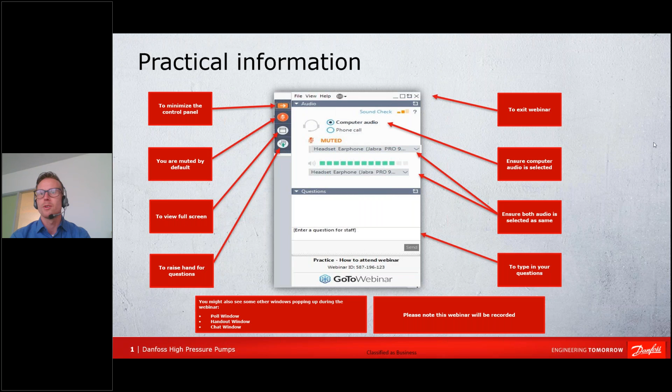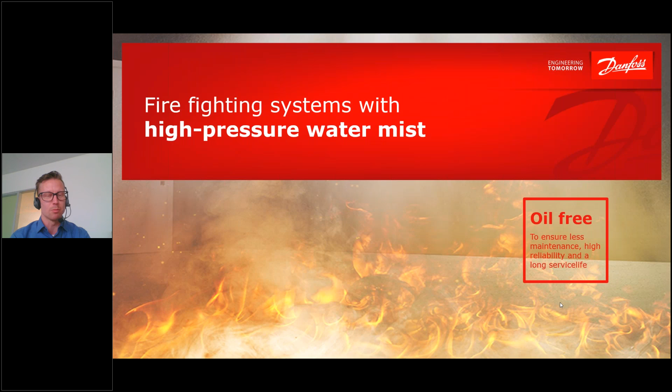Okay, but let's get started with the actual presentation. So what we will be talking about today is firefighting systems using high pressure water mist. And as I mentioned, we come from Danfoss high pressure pumps. I will be presenting the first part of this webinar where we talk about the high pressure water mist technology and some of its benefits. We talk about some of the products that we can offer into this segment. And then at the end, I have my two colleagues with me, both having a case to present about the use of our products in different kinds of firefighting applications.

Good. So as you see here, Danfoss high pressure pumps, we provide solutions for a number of different segments. Today, of course, we are talking about firefighting. And here we offer both our high pressure pumps, the so-called PAH pumps. We also have high pressure valves, different kinds of valves actually, which we will come to later. And we also have nozzles, high pressure nozzles, individual nozzles, not nozzle heads.

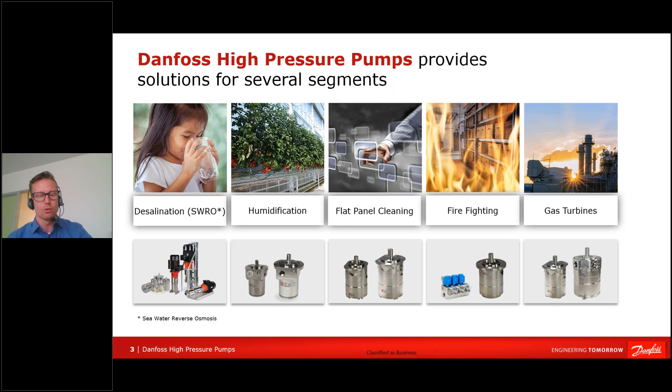So let's have a closer look at firefighting. So overall, you can say that in order to have a fire, you need three elements, and that is represented here in the famous fire triangle. You can remove one of the elements and you will kill the fire. You can, for instance, remove the heat. That's what you do if you use normal or traditional low pressure sprinkler systems. You can also remove the oxygen. That is, for instance, what you do when you use gas to extinguish the fire, or you can work on removing both of these two elements, and that's actually what is happening when you are using the high pressure water mist technology. And that's also why it's a highly effective and fast way to extinguish fires.

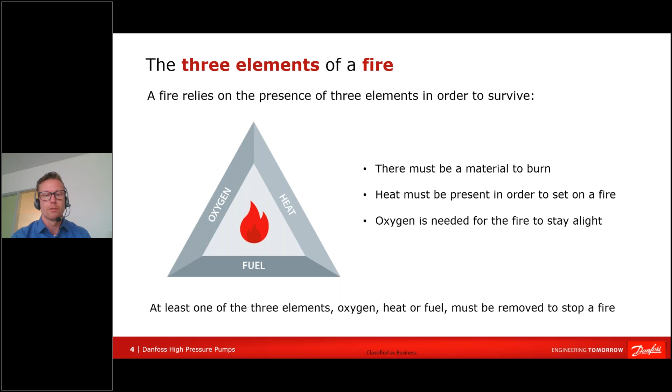If we then take a closer look at high pressure water mist, some of the advantages is, as mentioned, that this is a very effective way to combat fires, as it is working on both elements, the heat and the oxygen. And the water that is being sprayed is turning into a mist due to the high pressure at the nozzles, and it means that it will have a much higher cooling effect, up to 7 times higher compared to normal sprinklers. So when you extinguish the fire, it is typically happening much faster.

And on top of the cooling effect, the high pressure water mist also blocks the oxygen around the fire, almost like a carpet. So the fire cannot get any oxygen, and therefore is extinguished. So therefore, it's a very effective way to put out a fire.

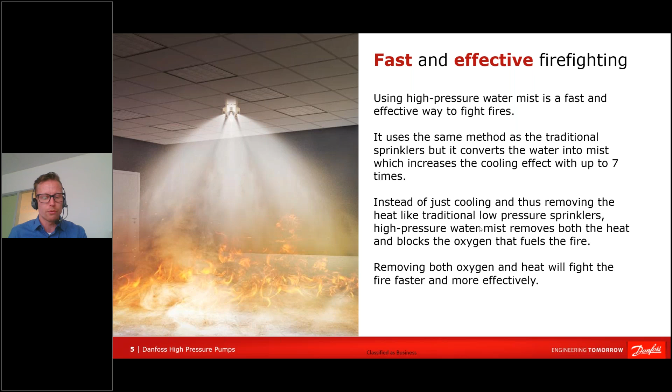If we move ahead, another benefit is that you need much less water to actually extinguish fires. In some cases, up to 90% less water, because it's so effective and because it's turned into a mist. So this also means that when you have less water, you also have less damage afterwards, meaning also your reconstruction of your building will typically be faster as there is less damage.

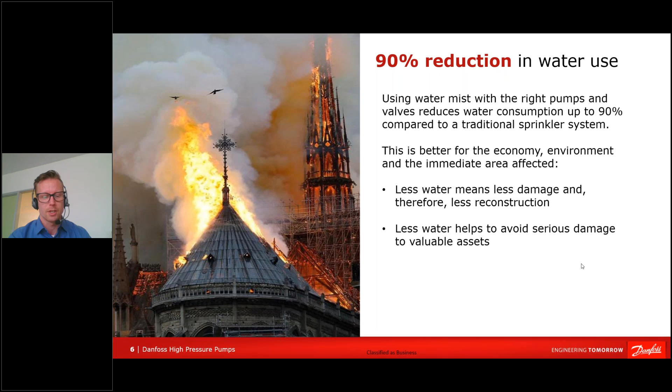In some cases, if we are talking about traditional firefighting systems that pour out a lot of water, the reconstruction can be much larger or much more costly than the damages by the fire itself. But this is not normally the case for high pressure water mist, due to the very low amount of water used. Yes, and if you take the next slide. So as less water is needed, also smaller water tanks are needed, and fewer tanks.

And if we look at, for instance, our piping, well, piping is smaller. Again, less water is needed. Piping does not need to be very big in size. And there are also other components where you can save money. And in total, it gives it a good or attractive capex.

Actually, we have one case study coming up, our second case study that you will see a bit later. Here we are also diving into this capex topic. Stay tuned. We have a very nice example for you there, how our customer was able to make a very efficient firefighting system, but also make it very attractive on the capex side.

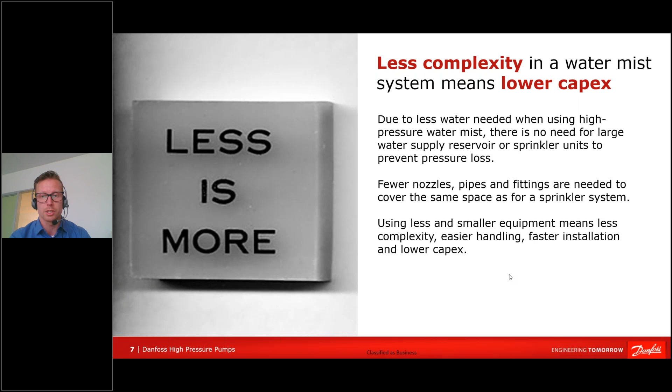And all in all, this means that the space you would normally use for water tanks and for the firefighting system, you can free up and use for other purposes. And in some cases, this can be very attractive to end customers. This is actually also one of the cases that we have brought today where that is the case.

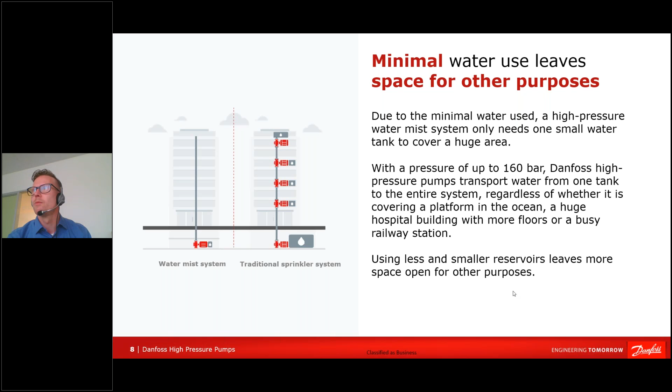Okay, if we turn the slide. But I'll move ahead. So if we move forward, let's look at what kind of products we offer here at Danfoss High Pressure Pumps.

I just have an echo on the line right now, so I'm a little bit... okay, I'll try and move ahead.

I'm sorry to interrupt, Kent. Indeed, we are capturing quite a lot of echo. Yes, I get that also in my headset. Can we try to maybe mute and unmute on the PC itself? Can this be an issue? Or in the meeting room? Just a second. Sorry for the participants. In the meantime, while we are fixing this, is it okay with you that we launch the poll question while you're fixing the audio? Okay, so now you are unmuted, Karen. Yes, and I hope you can hear me.

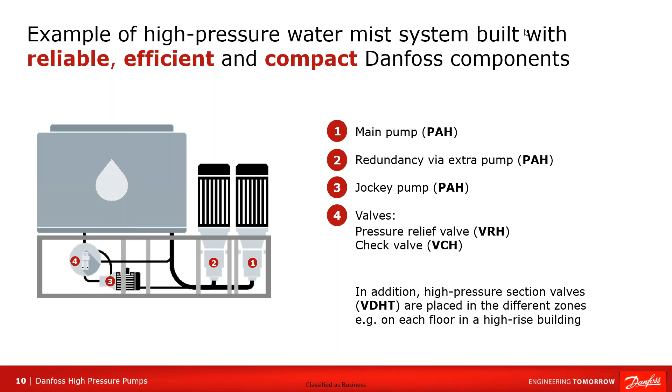Yes, that looks very interesting. I hope you can hear me now. Yeah, I'm gonna mute. Exactly. I think right now it would be better to go back to Karen's audio, because you are muted right now. Okay, I have unmuted my own microphone. I just have an echo, because I can hear Karen's sound. Apologies for that. Can we please agree that you mute your mic and go back to Karen's microphone? We could hear you without echo a moment ago. I'll try to do that then. This works now. Super. Thank you. Let's proceed. Perfect. Thanks, and sorry for the technical issues.

Let's move ahead. It looks very interesting to have both people that seem to know our pumps and business quite well, but also that many new people here today. That's very exciting. And therefore, it makes good sense that we now move ahead and talk about the products that we have.

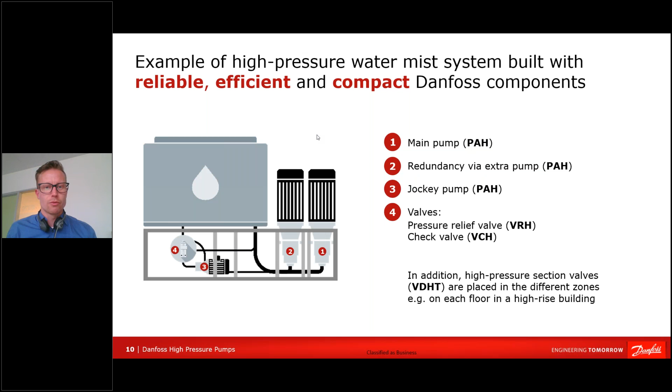In addition to this, what is not shown here on the pump skid, we have our VDHT valves, which are solenoid directional valves or on-off valves. They are used as part of section valves, so to control the different zones in an application. All of these we have more information about on the coming slides. So if we flip the slide, then we can move ahead.

First of all, we have our PAH high pressure pumps, and they are actual piston pumps built on the positive displacement technology. The amount of flow that they provide is directly proportional to the speed of the shaft. So the more rotations of the shaft, the more flow they provide. We have them in a number of different sizes.

If you look at the table below, the first two pump frame sizes are typically used for pilot and jockey pumps, whereas the last two ones on the right are used typically as main pumps. And they range in flows from 2 liters a minute to almost 147. Also worth mentioning is that these pumps can be sold with marine certification.

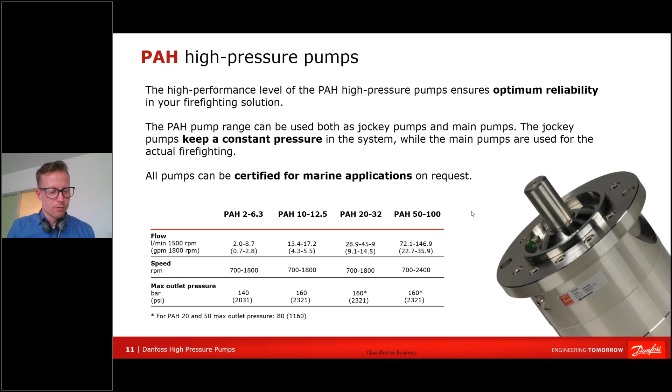Besides this, another relatively new thing is that we have released them up to 2400 RPM, so they can be speeded up for also 500 hours. This is again something that is very relevant within firefighting applications, in case you need a higher flow. And finally they can be bought in both clockwise and counterclockwise variants. If we move ahead to the next slide.

These pumps are highly reliable. They are made in stainless steel, and they are all tested, each and every single one of them, before they leave the factory. Especially within firefighting, having a reliable pump is, of course, of high importance. It's not so much the operating hours, but it definitely needs to operate when needed.

Also, we have a quite extensive quality system in-house. We are IATF certified, which is an automotive quality standard, so we are following very strict quality standards. Besides that, the pumps don't need a lot of maintenance. There is no oil in them, so they don't need any oil service. And they can operate up to 8,000 hours between service inspections, unless, as I just mentioned, they are released to 500 hours in special cases.

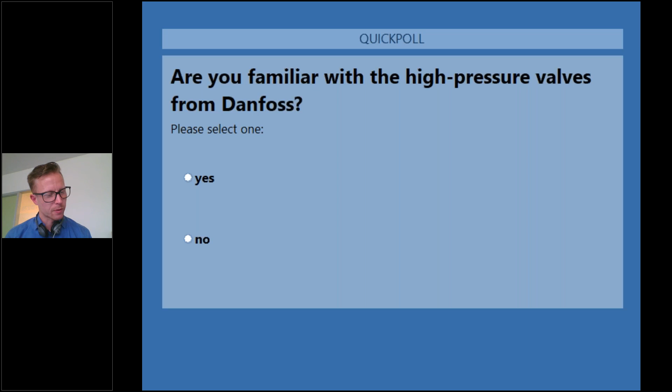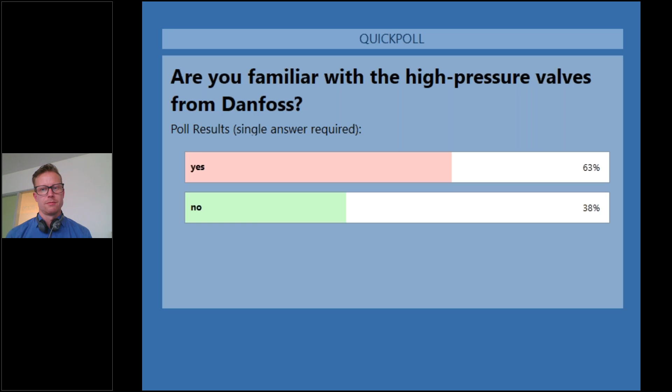All right, so sharing the results. So we have 63% who said yes, familiar with high pressure valves from Danfoss, and 38% said no. So would you like to comment? Yes, it's interesting to see that actually more people seem to know our valves here than the pumps, but we also have very nice valves, absolutely. So I'm pleased to see that.

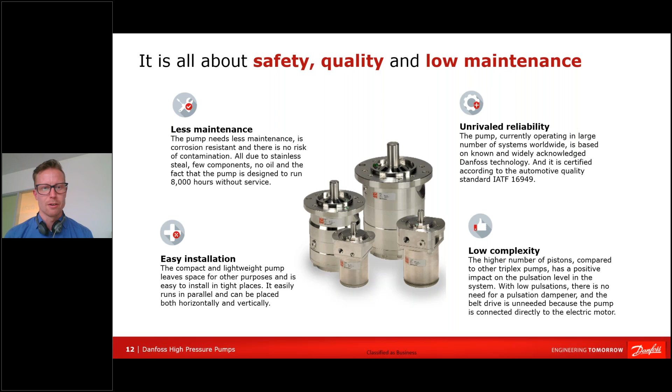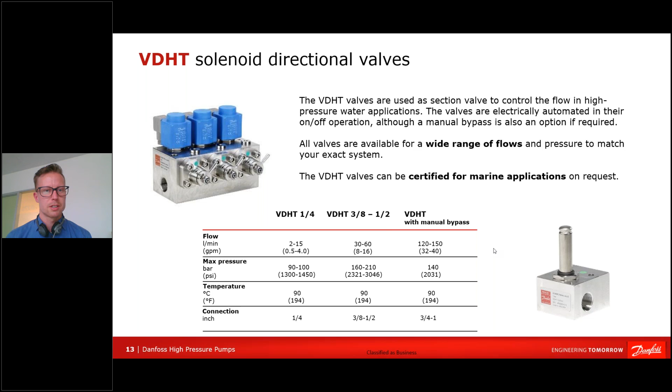If we move ahead, then let's look at some of the benefits we have for these valves. Good. Again, these are stainless steel valves, and they are also 100% tested from factory before leaving. So they are highly reliable and have a long lifetime. Also, they can be serviced without demounting them from the pipeline. So in case service is needed, it makes it very easy to do. And also they are very compact, making them fit into very, very tight spaces.

And at the same time, even though they are small and compact, they have a very high CV value, meaning that they provide a lot of flow with a limited pressure drop. So these are some of the main benefits that these valves can provide.

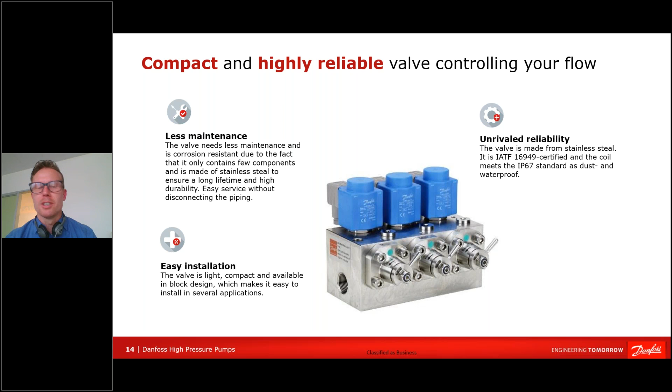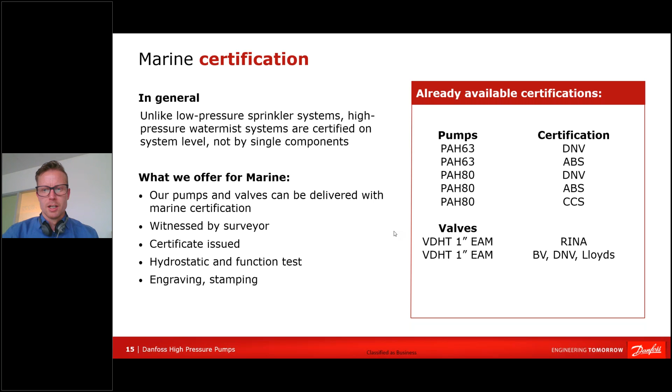If we move ahead, we have, as mentioned, marine certification on our VDHT valves, and also on our pumps. Some we have already, and some can be requested. Having approvals on the product is typically not something that we see within the high pressure water mist market. There we are talking about system approvals, and this is also the case here, of course. But for marine, there are additional certifications, and there we are also able to provide this. It just needs to be requested before ordering. Let's move ahead.

Finally, we have our relief valves. As mentioned, they make sure that the system pressure does not exceed certain limits, and if it does, then they open up and relieve some of the water either to a drain or back to the tank via the filter. And we have them also in different sizes, ranging from 5 liters a minute up to 120 liters a minute. And actually for firefighting, we have a dedicated version called the VRH 120F.

The special or unique thing about that valve is that it opens and closes more or less right away, whereas the other valves open and close over a longer time. So we have optimized the VRH 120F for firefighting. And the technical specifications are the same as listed here. Yeah.

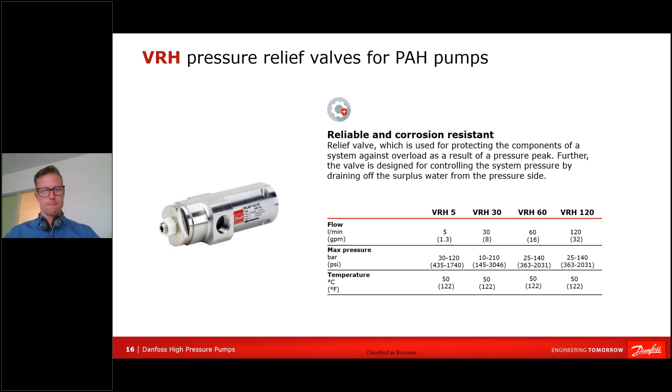Okay, and the last valve to be shown here today are our check valves, also called non-return valves. They make sure that flow is only in one direction and that flow does not flow back to the pump on the high pressure side. Yes, I think that was it. I hope I did not speed up too much here in the end. Before we come to our cases, are there any questions?

Yes, I got a question here. One of the participants is asking, can we buy a whole water mist system from you? Okay. Well, thank you for the question. No, not from Danfoss High Pressure Pumps. We are providing components to a range of different customers who would then typically build the whole system. So we don't provide systems, we provide components. I know that some people might confuse this because we have a sister company within Danfoss that also provides systems.

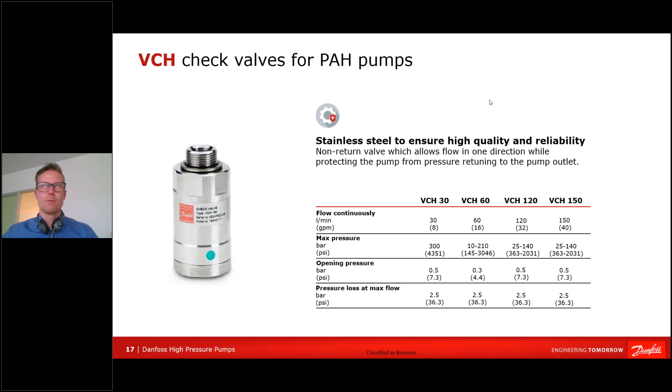Okay. Yeah. Okay, but then let's move on to some. Yes, let's move on to the cases.

We have many years of experience with firefighting, and we have already a lot of products installed in various applications around the world. It could be buildings, it could be different kinds of marine applications, and it could be also infrastructure projects where we have our products installed.

And if we jump to the first case, we have today brought a case about firefighting on board trains, and I will hand over to Claudio for presenting that case.

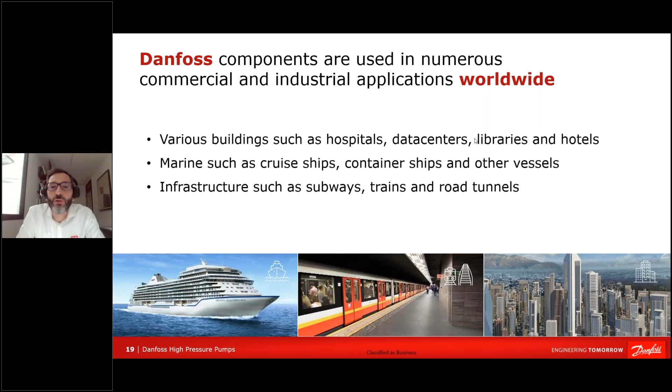Hello, yeah. Can you hear me? Yes, we hear you well. Good. Thanks a lot, Kent, for your presentation.

I will show a real case and explain what Kent has shown us before on a real situation that we've been studying first and then realizing, and see what we achieved. As you can see, the requirement from one of our customers, around 2018, was to collaborate in projecting a new firefighting system located on board high-speed trains.

As you understand, there were many challenges, because a train is not a simple place to locate a firefighting system. The firefighting system had to be, of course, effective, but also simple in realization and compact, because every firefighting system had to be independent on each car.

So from the beginning it was very important how to design this system, considering that the commercial space on each car was very important for the end user. And so the compactness of the system was absolutely needed. Another requirement from the customer was that, as every firefighting system was working independently, the water would not damage the furniture and the electrical components of each car. This was in case of a very small fire.

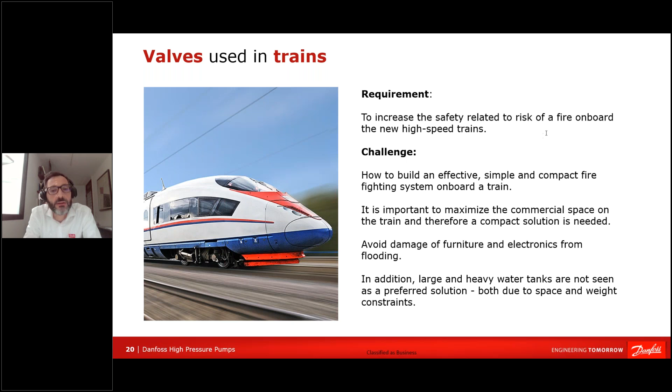Can we move to the second slide? Okay, here we see the solution. The solution that we found was a high-pressure water mist system activated by nitrogen. What does it mean? Kent has already shown us the meaning of a high-pressure system and why a high-pressure system is used. The high-pressure system has two effects.

The first is the cooling effect, meaning the temperature inside, in this case, the car of the train, drops dramatically in a short period, and this helps to extinguish the fire. The second is the segregation of the oxygen. In fact, when we spray water at high pressure, the drops that come out from the nozzles are very, very small. And each of these very small drops segregates oxygen. And without oxygen, the fire extinguishes.

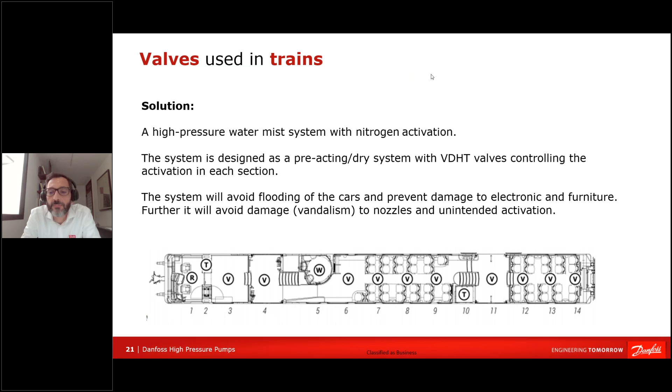Okay. The result is that together with the client, we selected the VDHT 3/8-inch normally closed valve. This is a very, very compact valve. It's completely built in stainless steel AISI 304. It can work with a pressure up to 160 bar and a flow of 30 liters per minute.

Why did the customer like this valve? The valve is very simple to use. It's extremely reliable. Consider that we test every single valve before shipping out from our warehouse. Each valve is made to achieve a lifetime of at least 500,000 activations. And this was extremely important for the reliability of the system.

The valves were combined with a very small tank, only a 60 liter tank, that is enough to extinguish a fire on the entire car of the train. This is it on my side, if there will be questions.

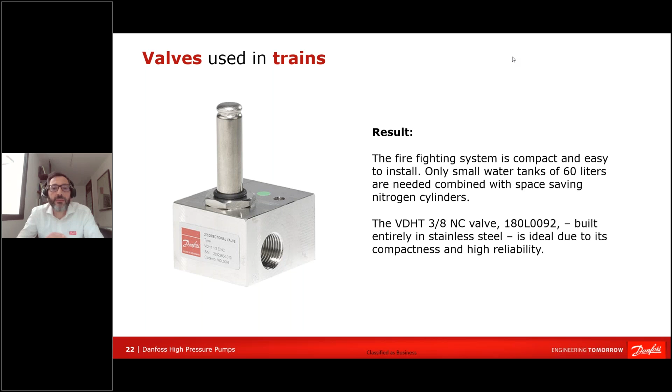Okay, I think that was the only question. Thank you very much, Claudio. Thank you. Let's move on to you, Roman. You also have a very exciting case story to present. Okay. Good afternoon, everyone. Do you hear me? Do you see me? Good afternoon, everyone. Yes, yes, all good, all good.

Okay, thank you. So let me introduce our case story. Sorry, my name is Roman. I'm key account manager in the Moscow branch office in Russia. In Russia, we closely cooperate with the Foxstream company, with the registered trademark of the same name. This is the leader in innovative technologies in the local market for firefighting systems.

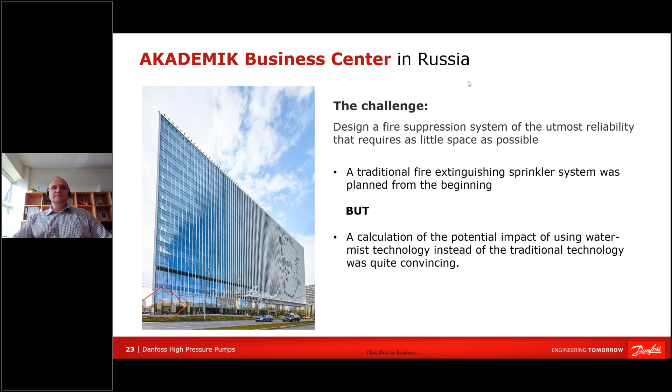So besides relief and check valves, this system used frequency converters, pressure sensors, and pressure relays from the Danfoss product line. It means we can provide an almost complete supply set of our equipment for a system from one supplier. In some cases, this can be an important argument in favor of choosing Danfoss products. Next slide, please.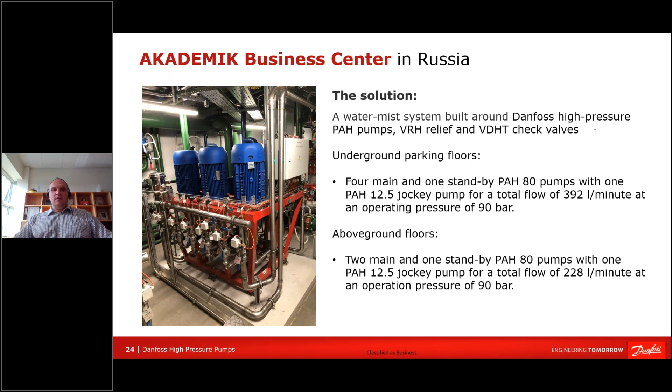Well, once again, I want to draw your attention to the fact that at the design stage, a comparison was made with the sprinkler system, which at the first stage was designed until the moment the customer abandoned it in favor of the Foxstream system.

For comparison, the entire Foxstream system at the facility took only 9 square meters. Just imagine, 9 square meters only versus the sprinkler system. Further, the freed up area was multiplied by the market value per square meter.

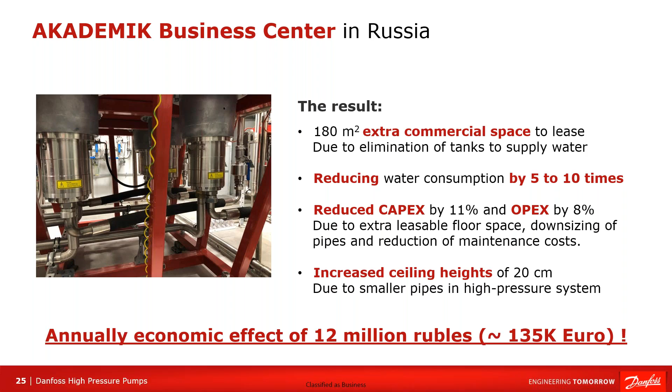If we have a customer application where we are using more of our pumps, I'll turn on the camera also, then what we recommend is, if possible, to use one relief valve. That would be the ideal case, because then we avoid having more relief valves that need to be set exactly the same, so it's not just one of them that opens at a given pressure and the other one opens at another pressure. So therefore, one relief valve per system, if possible.

With that being said, I would also say that if you have any questions regarding P&ID schematics, we would also offer to have a look at that, to give our inputs on that. Yeah, I think that's it.

I don't see, Karen, any more questions. Yes, try to have a look. I think we just received one more question. I hope we can still respond before the end of the webinar. Could you see it right now in the system? No, I don't see it. Can you read it out?

Yes, absolutely. So, high pressure mist firefighting seems so much better. Do you think it will eventually replace low pressure systems? I don't know if I should answer, but I would say I don't see that it will completely replace sprinklers. There are some clear advantages, but there are also some limitations.